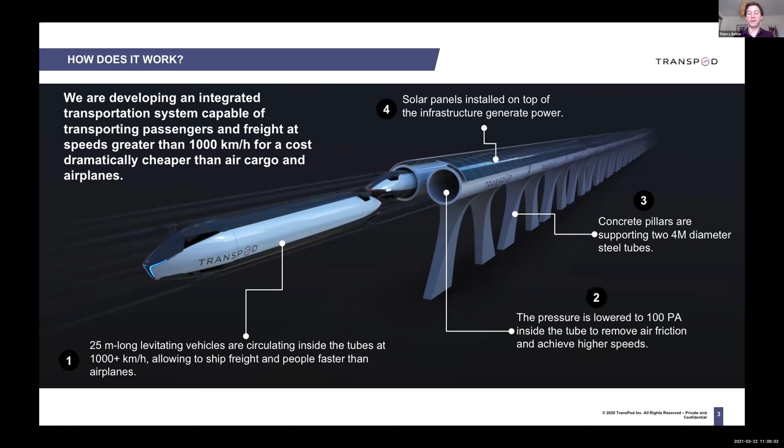There's a departure every 2 or 3 minutes. And as I said before, it's small vehicles. So just think of the subway, but at the scale of a country. You get to the station, you board the vehicle, at the same speed as an airplane, you arrive, if we're talking Toronto, Montreal, 45 minutes after departure, and you're in the city center of Montreal.

A few information about Transpod. The company was created almost 6 years ago now in Canada. We opened the first office in Toronto, and we also have an operation in Italy and France. In Italy, we're working mainly with our investors, an Italian industrial company. And in France, we have a few people. Actually, Dmitry is working from our office in France. They're working mainly on the technical developments of the subsystems.

We are very proud, again, because we have a nice and strong project going on with the government of Alberta for a line linking Calgary and Edmonton. It's the first agreement we've signed in Canada, so that's pretty good. And it's a 3 steps project. I'll talk more about that later, so I'll give the details at the end of the presentation.

We were the first one to publish publicly a feasibility study for a Transpod or Hyperloop line in general in Thailand. That was 2 years ago now. The study was financed by a political candidate who wanted to include Hyperloop and new technologies into his platform. He did quite well in the elections. And the most important thing to note here is that it's one of the first times that politicians were really pushing for this kind of technology to happen in their country.

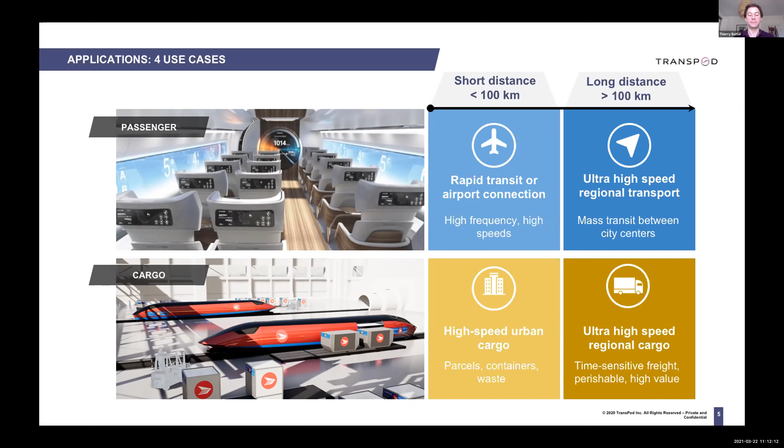And for that, we have, for example, what we call airport connections. It's nice to start with a smaller distance, even though we don't reach very high speed, but we can still demonstrate the feasibility of the technology over 10 or 20 kilometers before expanding the lines between cities.

I won't spend too much time on the technical advantage that we have, because some of them are very sensitive and private information, but we are focusing most of our technology on the vehicle rather than the infrastructure. The vehicle is something that you will use a lot, like all of the time. The infrastructure is used only when there's a vehicle that's passing by. So it's much more important to put all the money and the fancy stuff on the vehicle. And it's also cheaper to build the line if it's very basic.

So it's not very basic, but the infrastructure is a steel tube with some things inside that I can talk about, and concrete pillars. It's still a little bit expensive, but much less expensive than, for example, what was introduced at first in the Hyperloop Alpha document from Elon Musk, where he suggested to have electromagnets along the way.

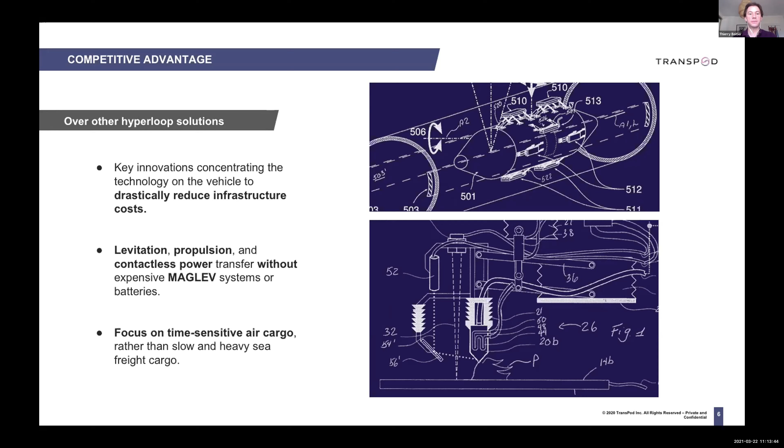Some of the competitors are using maglev technology. Maglev, you're required to have electromagnets all along the line. And we know as a fact that that's super expensive. Actually, that's why there's only one maglev commercial line in the world, and it's not even profitable. So that's one of the key advantages of Transpod today, is to have a low cost of infrastructure. And well, of course, then the business case is better. And it's much easier to convince investors that our project may be feasible one day.

And as I said before, Alberta is one of the 2 lines we think would make sense in Canada, at least as a first. Of course, well, we would love to have a line doing Canada coast to coast. But so we're focusing on Toronto, Ottawa, Montreal. It's much more difficult to put in place because we're dealing with 2 provinces and it's a longer corridor. So we managed to secure a deal with the government of Alberta first.

Calgary to Edmonton, that's about 350 kilometers. So the capex for the infrastructure is much lower than for a longer line, so it makes more sense. And our project is in 3 steps. The first step, we're doing it now. It's a feasibility study to assess, well, everything. The ridership, the cost of the infrastructure, and then putting all the calculations together and seeing if the line would be profitable or not. Of course, if it's not profitable, then that's the end of the project, and we'll find another location where it makes more sense.

We really hope, and so far the numbers are pointing in that direction, that the line should be profitable. So the second step will be to build a test track, 10 to 20 kilometers, most probably between Edmonton downtown and Edmonton Airport. So we can test the technology and showcase to investors, the Canadian government, the Alberta government, that the technology is working.

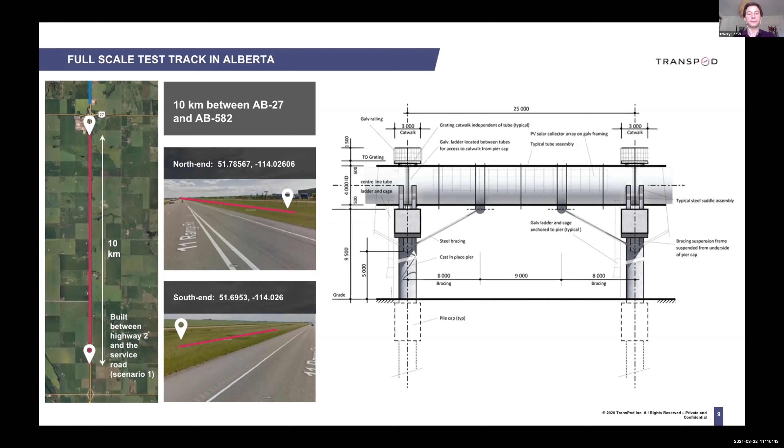So that's a short, quick snapshot of the test track. Something very convenient also to say about Alberta and the connection between Calgary and Edmonton is that it's flat, and it's straight. So it's very easy for us to build a test track there.

And finally, the roadmap about Transpod. So that's mainly to show you that it's a very long-term project. Basically, when I joined the company, one of my first questions, like for many other people I know, was when do we start to build? When will we have a prototype or something? And then I quickly realized, well, no, this is something that's going to happen in a few years.

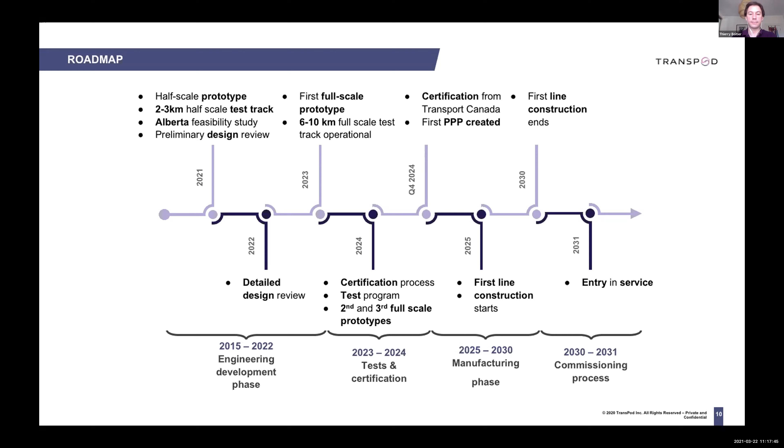It takes between 3 and 4 years to develop the whole technology. We have a few milestones that are the test tracks. So we are building a test track in France, a half-scale test track, the full-scale track, most probably in Alberta. And then we're aiming at 2025 for the construction of the full line, and 2030, maybe 2031 for the first operations of the line. So be patient, we're working on it, but you still have about 10 years before we could ride the first Hyperloop line. And I mean in a commercial way.

So that's the overall presentation on Transpod. Again, the chat is open. Feel free to ask any question in the chat. We'll answer them at the end of the presentation.

Dmitry is going to present you. Well, I'll let you do the introduction. Okay. Hello, I'm Dmitry. I'm a Russian nuclear engineer, and I defended my PhD here in France on simulation of plasma guns. And now I'm working in Transpod and helping them with various kinds of physics and simulations. And this is my topic of the presentation, modeling and simulations.

So first I will introduce you to the terminology of my field. Then I will explain the basic algorithm I need to follow when I want to simulate something. And finally, I'm going to give you a few examples from my work and from the world of simulations in general. So without further ado, let's start.

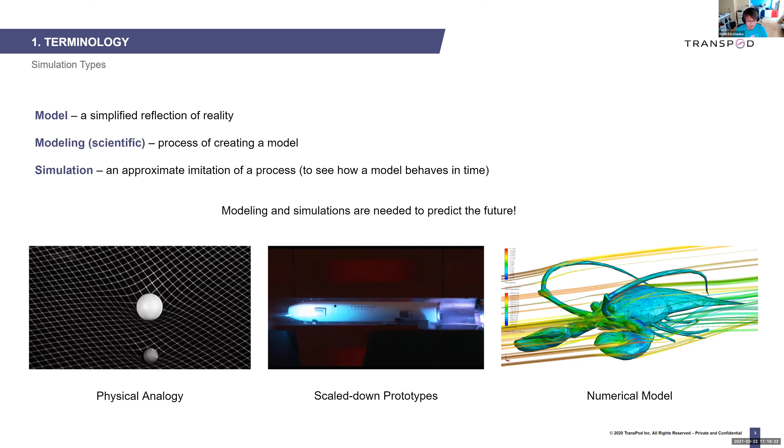So a model is a simplified reflection of reality. When we talk about modeling in a scientific sense, it's a process of creating a model. And finally, simulation is an approximate imitation of a process. So basically how a model evolves in time. The ultimate goal of modeling and simulations is to predict the future. And there are multiple ways of doing this.

For example, there are models based on physical analogy, like on the bottom left picture, where the gravitational force between celestial bodies is represented by a piece of cloth. Then in the middle, we have another type of model. It's a scaled-down prototype. Here, it's a scaled-down version of a Transpod vehicle being exposed to an airflow in a tube. And on the right, we have a numerical model, which is fully inside of a computer. There are many other types of models, but I'm concentrating here mostly on numerical ones.

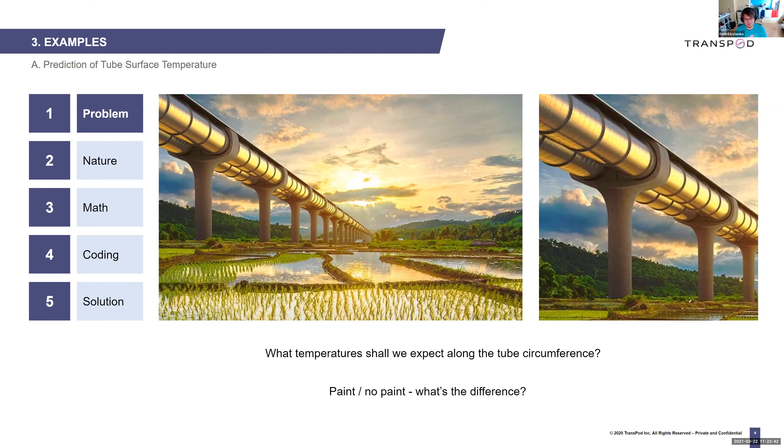So here are two tubes and there's sun and the sunlight hits the tube. And if the temperature is too high, then there could be a lot of nasty things like thermal expansion of the tube, or maybe inside the capsule it will be too hot. So it was important to know what is the maximal temperature. And another question was whether we need to apply coating to the tube surface or not to reduce this temperature. Like, do we have to paint it white, or maybe it's okay just to leave it as it is?

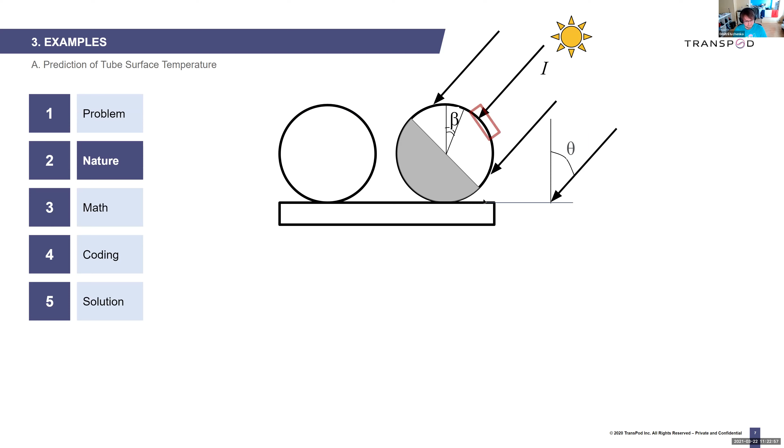So first I analyzed the nature of the problem. Here is the cross section of the two tubes. Here's the sun and sunlight that arrives at a certain angle. Let's consider a smaller segment of the tube and see what happens there. So the sunlight arrives at the tube surface. Part of it is reflected, another part is absorbed. The absorbed part increases the tube temperature. At the same time, the tube is being cooled down by participating in heat exchange with the surrounding cold air and by emitting thermal radiation.

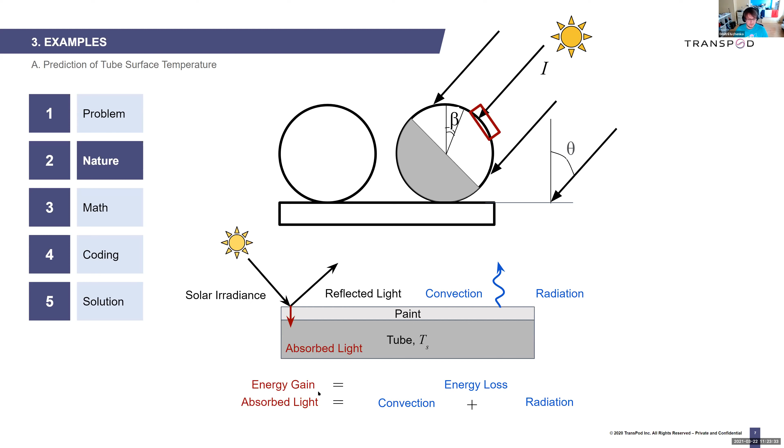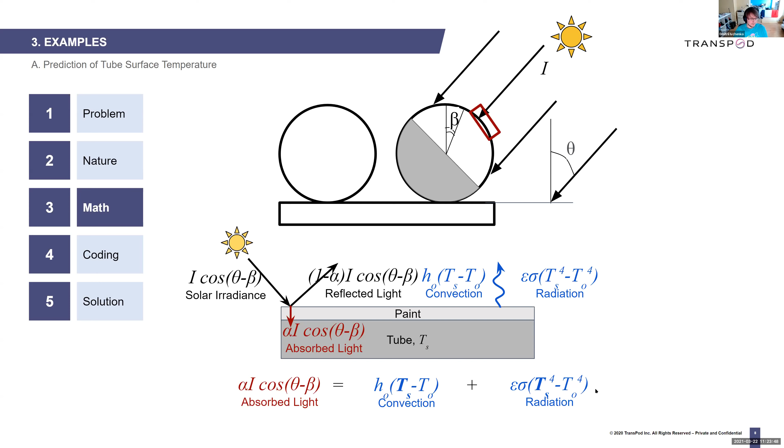So in the end, we have this energy balance between energy gain from absorbed light and energy loss. And this is really physics in a nutshell. Every term of this balance is a well-known physical law, and if we write it down, we'll get the equation we have to solve. I won't be explaining each and every term here. All you need to know is that there is only one unknown here. It's Ts, the tube surface temperature. The rest we know. How to solve it? Well, we need to do some coding.

So first, I rearranged the terms of this equation. I put all the terms with the unknowns on the left side and all the known things on the right side. And I got an equation that looks like this. It's a quartic equation, and it could be solved graphically by finding the intersection between this curve, the blue line here, and this constant, the red line here. This kind of intersection could be found using a simple for or while cycle in any sort of programming language.

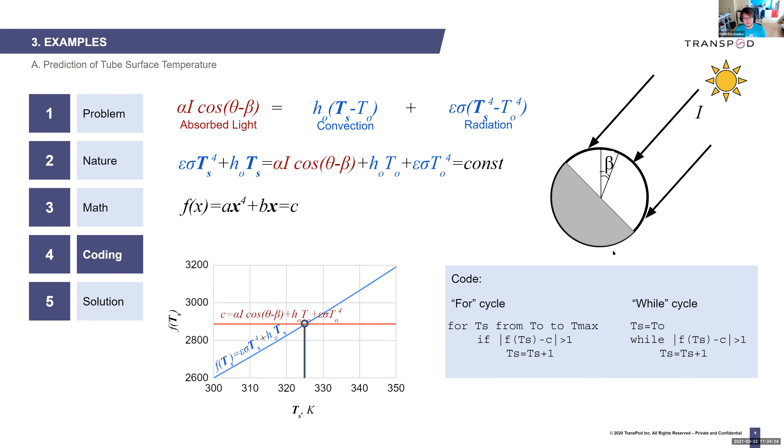So the answer to the original question, whether we should apply coating or not, was yes, we should, because it brings us this significant advantage and simplifies the decisions of other engineers in the team. Similar mathematics and physics is involved in computer graphics when we need to simulate how light reflects from surfaces.

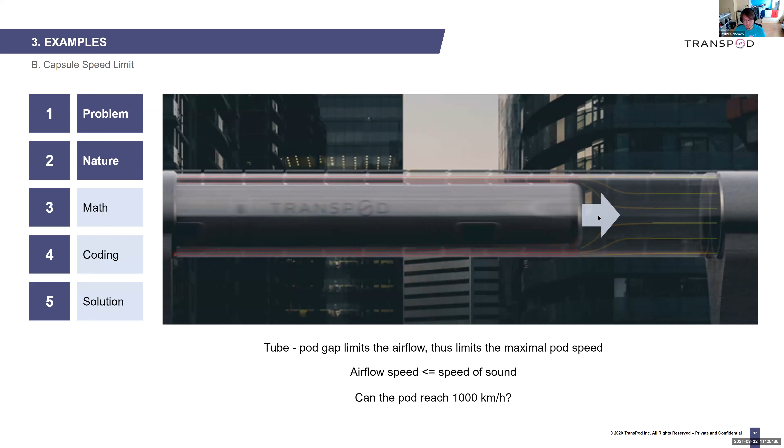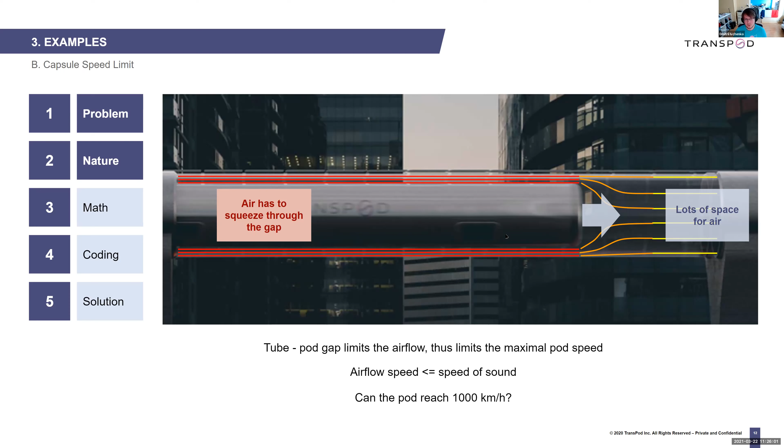The next example is a little bit more complicated, and this is what I'm dealing with the most in my practice. It's about the gas dynamics or aerodynamics inside the tube. So let's consider a vehicle that moves inside the tube at high speed. While it moves, it displaces the air in the tube. So the air has to squeeze through this narrow gap. While the air squeezes, it accelerates to very high velocities, and it appears that there is a limit to this speed. The speed of this air is limited by the speed of sound. And in fact, this thing also limits the maximal speed of our vehicle.

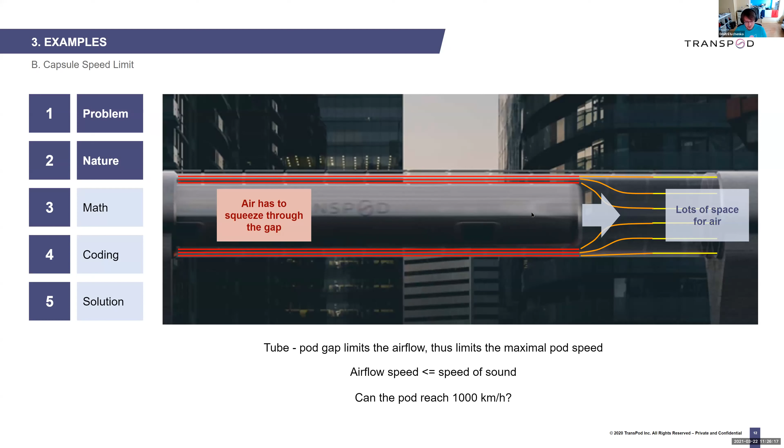So the question was whether our vehicle can reach the promised speed of 1,000 kilometers per hour, or will we bump into the threshold of this air squeezing speed limit. And in order to find the answer to this question, we have to solve this system of equations. The most important ones are these three. They describe the velocity of the gas. They're called Navier-Stokes equations. And believe me, this system of equations is as scary for me as it is for you. So usually we don't even try to code the solution of the system by ourselves. All we do is we buy software that does the simulations for us.

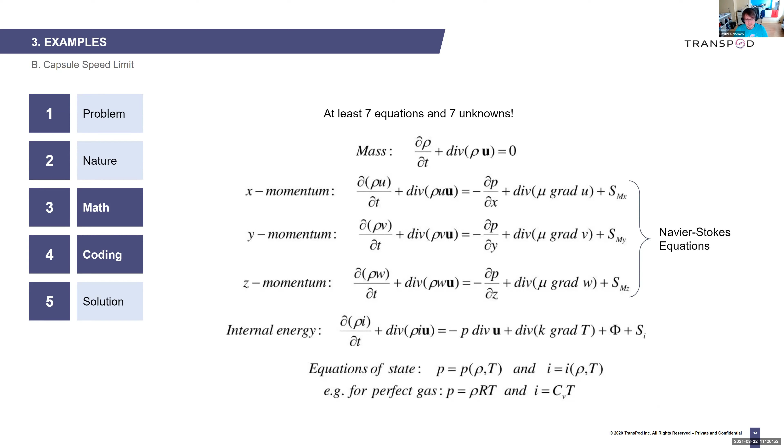All we have to do is to build a 3D model, import it into the code, and run the simulation. And the results would look something like this. Let me interpret to you what happens here. So on the bottom left, we have lots of air pressure inside the tube. So when the vehicle moves from left to right, it compresses the air in front of it. So as you can see here, it's red.

It's the high pressure. On the top left, we can see the air temperature. Because the air is being suddenly compressed in front of the vehicle, its temperature increases. So as you can see here, it's red. This is actually beneficial for us because in hotter air, the sonic velocity is higher. In this gap, the sonic speed is around 400 meters per second.

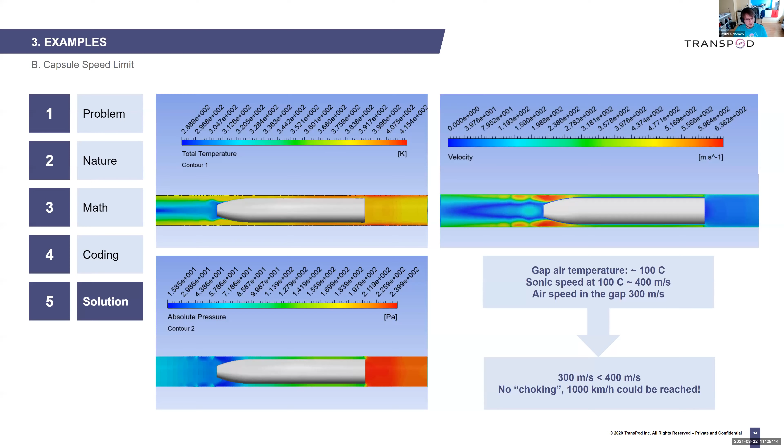Here on the right, we can see a plot of the air velocity in the tube. And in this gap here, it's green, so it's around 300 meters per second. And thus, because 300 meters per second is lower than the sonic speed under these conditions, which is 400 meters per second, we could claim that 1,000 kilometers per hour is indeed not a limit, and we can go even faster.

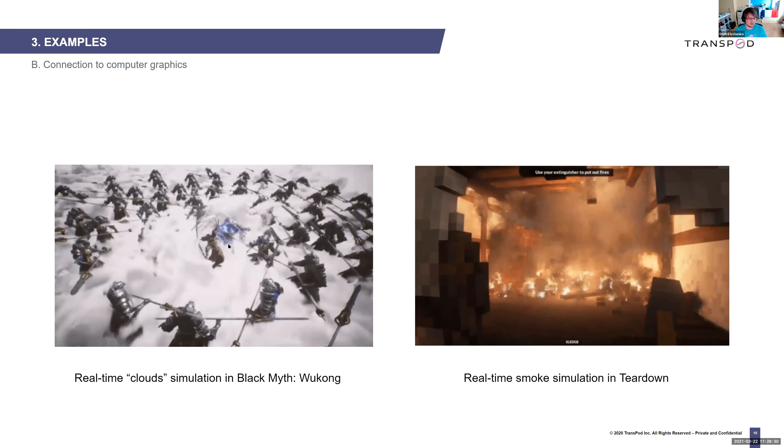Navier-Stokes equations are quite heavy to solve, but due to advancement of computer hardware and software, now there are some games that solve these equations in real time. Like on the left, you can see cloud simulations happening, and on the right, there is a smoke simulation running in real time.

Thank you for your attention, and now I'm going to give spotlight to Augustin, who is going to tell you about industrial design and passenger experience. Thank you.

Thank you, Dmitry. Thank you very much. Okay, let me share my screen. Okay, can you all see my screen? Yep, all good. Yeah, okay, nice.

So I'm Augustin, I'm an industrial designer, and I will present to you what design brings to Transpod. So further, I'm 39, I'm from France, and I live in the Netherlands. I have a lot of experience in transportation industries. I started with car design for Jaguar, and then I quickly moved to the railway industry. I joined the company Alstom for 15 years, where I designed metros, tramways, mainline trains, and high-speed trains for various locations in the world. Then I spent a lot of time creating their interior and exterior design from economy to business class concerning the railway industry.

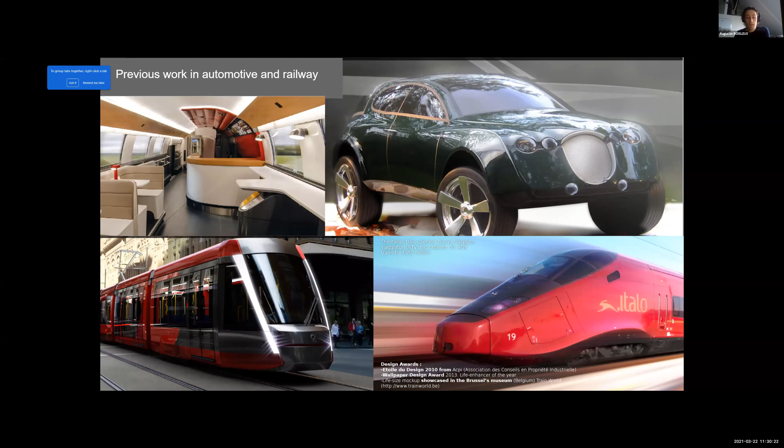And then I learned a lot on how people move and what could be done to improve the experience. However, I had to work within the limits of a system that has been shaped centuries ago. There are a lot of limitations that can't be overcome due to existing infrastructures, technical constraints, and regulation restrictions. However, last year, I joined Transpod, where everything is possible, because we can change everything. We start from scratch, from a white sheet, and then we can change everything for the best.

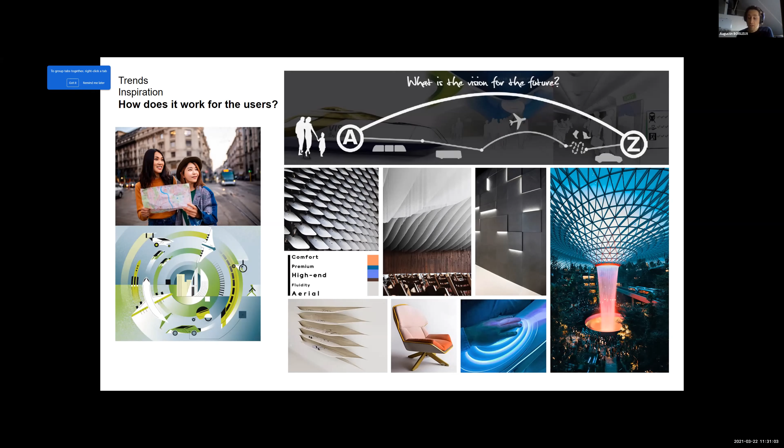So here is how designers work. First, we analyze the current situation and people's needs and expectations. How will people live in the future? How can we make sure that our product will match their needs in terms of travel? So the goal is to make sure that our solution will be more than simply a faster way of moving, but also a better way of moving.

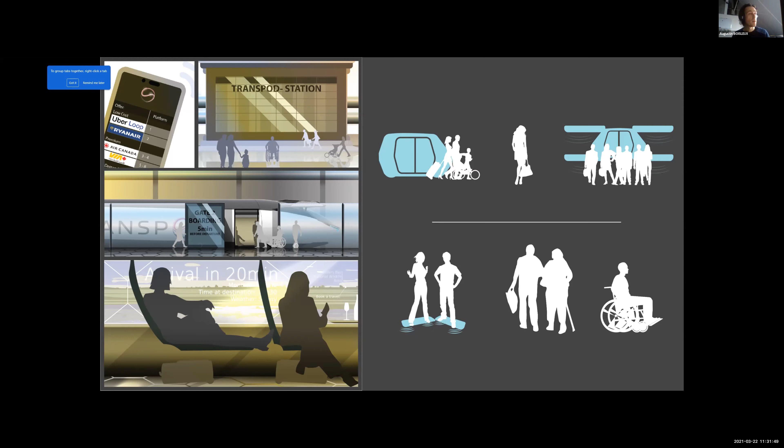Then we also create scenarios. We try to imagine all the passenger types going through any kind of situation to make sure we improve the way people travel. We had in mind all the inconveniences we can meet when we use trains and planes to make sure that we solve them. And to do that, we try to keep a holistic point of view. We consider the tangible part, the digital part, the infrastructure too, and then the vehicle, and also all the other modes of transportation that they are connected to. And then we try to map everything and to create the best passenger experience for the users.

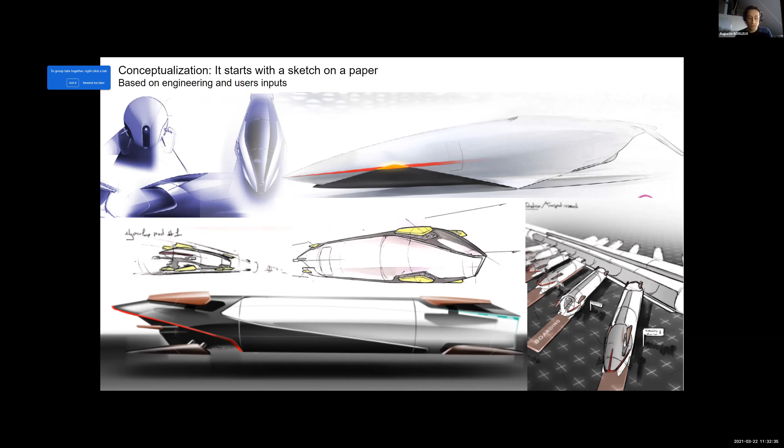So from that analysis, from all the scenarios, we start conceptualizing and shaping our ideas. So it's hundreds and hundreds of ideas that are shaped simply using a pen on a paper at the beginning. And we integrate step by step all the engineering inputs provided by my colleagues, such as Dimitri and Thierry, all the things I talked about just before, and all the other colleagues. So the goal is to create the product that is the best solution for what it's supposed to do. So it's also important to give it, of course, an inspiring look that communicates its functions and its values.

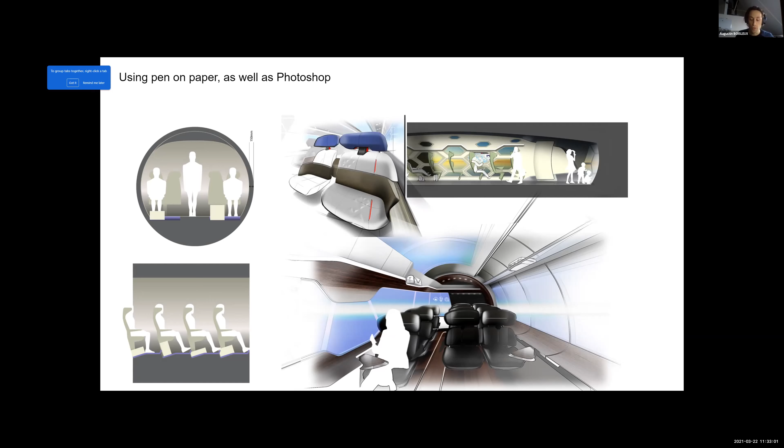For the interiors, the process is the same, with a greater focus on the passenger experience. We first need to develop the most optimized architecture that will allow a high level of personalization to meet all the needs of the future type of travels. We want to make sure that even when the system will be saturated with passengers, the experience will still be superior to the conventional transport systems that exist now.

Of course, everything you see here is preliminary work. The next step after the sketch, as you can see, is to create a 3D model. It has improved a lot from what you're seeing right now, but you cannot see it today. So step by step, we improve this 3D model, and we also create some realistic images, because they are useful for our future partners and also the future users.

Then they can understand what we plan to do. They can get used to the future things, how they will travel. They can project the future of mobility. And then all the feedback we get from communicating these images helps us to improve our vision in return.

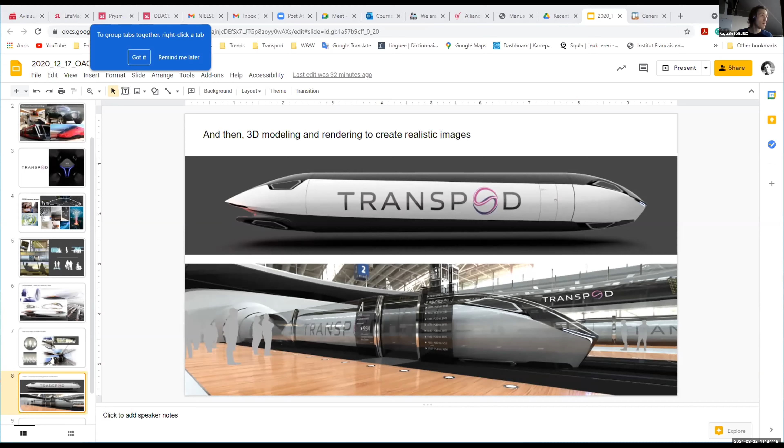All right. Hello. Can you hear me okay? Yeah. All right. Hi.

So my name is Kyle Simmons. I work here at Transpod doing electromechanical engineering, prototyping, and testing. So people come up with an experiment or an idea or something they want to try, I put it together and see what happens. One of the things I've been working on lately is the levitation system for our vehicle, because traveling down that pipe at 1,000 kilometers an hour, to keep everything nice and efficient, we would rather not touch anything.

So I like to think of the vehicle as surfing on a wave of electromagnetic fields, or kind of surfing on a magnetic field. So what does that mean? How do you float something with magnets? If you take a permanent magnet, like everyone's used to on their fridge or from various toys, and put that near something metal, it will attract. It'll jump up towards that metal and give you a bit of a force. It has some lift to it.